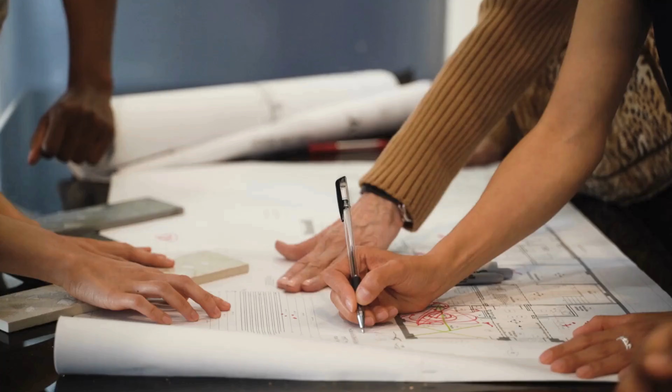The reason BIM exists is because construction is incredibly collaborative. Even a relatively small project might involve several different specialists, architects, engineers, contractors, suppliers, clients, and the list can go on. And all of them need different information. The problem is that they've often been working from different versions of it.

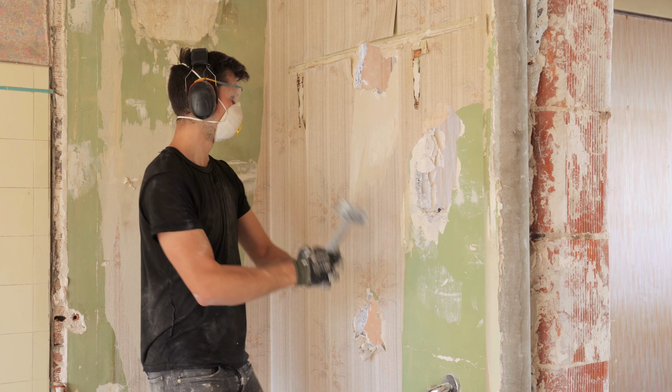One person has a spreadsheet, someone else has an updated version. One team is working from one set of drawings, whilst another team is working from something completely different. Someone might change the location of a door and update the layout drawings, but not the structural drawings. So now there's a hole for a door that's moved. This then leads to delays, rework, and extra costs. That's why BIM exists in construction.

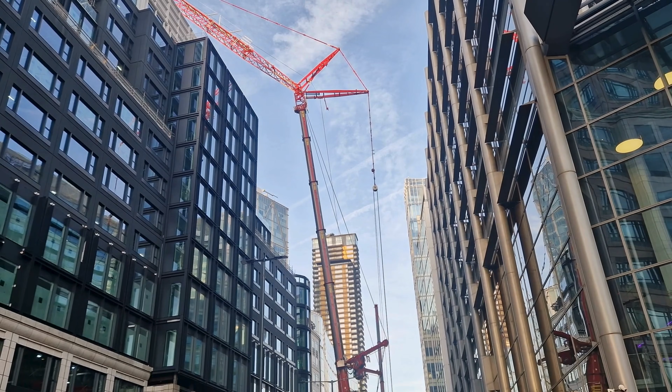At its core, BIM is really about managing information so that the right people have access to the right information at the right time. Now, in architecture, engineering, and construction, a single project will generate incredible amounts of data. Some of this data will be stored within a BIM environment, but there's still lots of information that lives outside of the model itself. And this is where the Common Data Environment, or CDE, comes in.

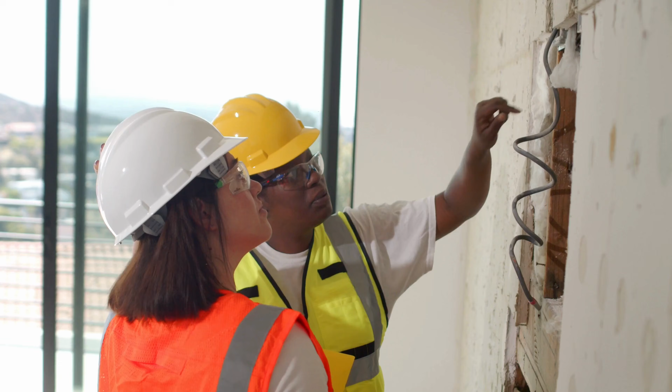The Common Data Environment aims to be the single source of truth. It's where project information is collected, managed, and shared. This includes not only the information you would get from a 3D model, such as what it looks like, the shape of things like walls and doors and where they're positioned in space, but also the descriptive information you need to support it. Things like fire ratings, manufacturer specifications, maintenance information, and commercial data such as costs.

But then what's the difference between BIM and the Common Data Environment? Well, BIM is the process or strategy for how we manage digital information, whilst the CDE is the platform where that information is stored. The CDE enables your BIM strategy.

Let's take a song as an example. BIM is the actual track. It's the music, lyrics, instrumentation, and audio files created by the musician. Whilst the CDE is something like Spotify, Apple Music, YouTube Music, or SoundCloud. It's the platform where the tracks are uploaded, stored, and organized into albums. This is how music gets updated and distributed so that all the fans are listening to the exact same version.

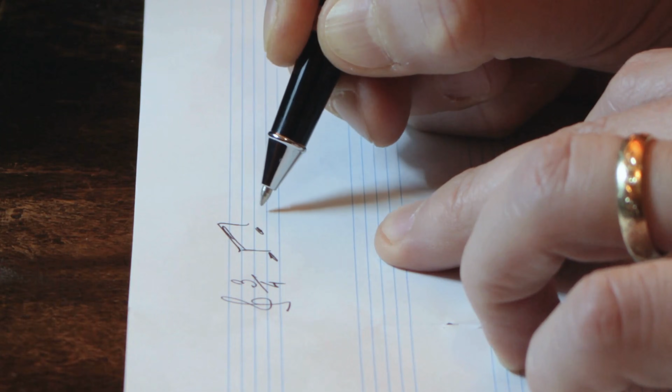And just like how a singer, a drummer, and a saxophonist all contribute different elements to a song, an architect, an engineer, and a contractor can all contribute different elements to a BIM model. And if an artist decides they want to change the chorus or a lyric, they can upload a new version that everyone can listen to straight away, as opposed to in the past where you'd be stuck with whatever CD or mixtape you happen to buy at that moment in time.

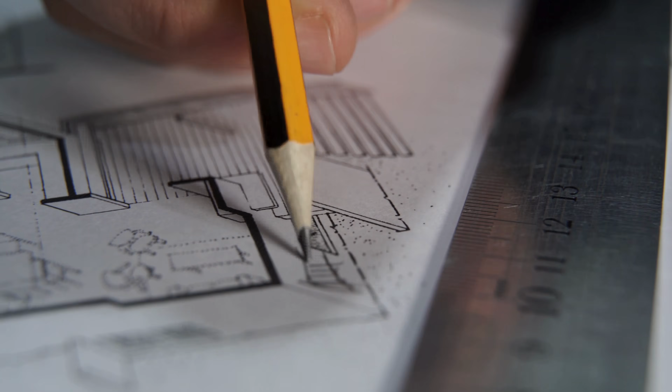And again, it's the same in construction. If an architect moves a door, updates the specification, or changes part of the design, everyone can access the latest information rather than working from an outdated file. But BIM isn't just about storing and sharing information, it can also connect different types of information together, and that's where the different dimensions of BIM come from.

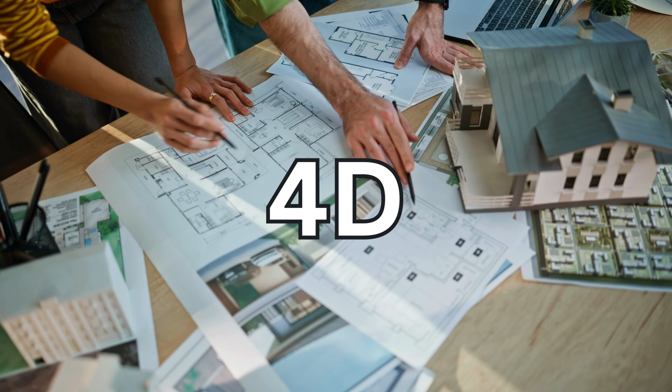Historically, we had 2D drawings, and then along came 3D. You take the X and Y of a traditional drawing and add the third dimension in space, allowing you to better visualize what you're building. After that comes 4D BIM, where you add the construction schedule. This includes the duration and timing of when things are getting done, and also includes the logistics, so what's getting done first, who's working where, and where on site are things getting delivered.

It's useful for identifying clashes not just in the design, but in how the project is actually going to be built. Then there's 5D BIM, where cost information is added. Now you can start linking the model to budgets, quantities, and project spend as work progresses.

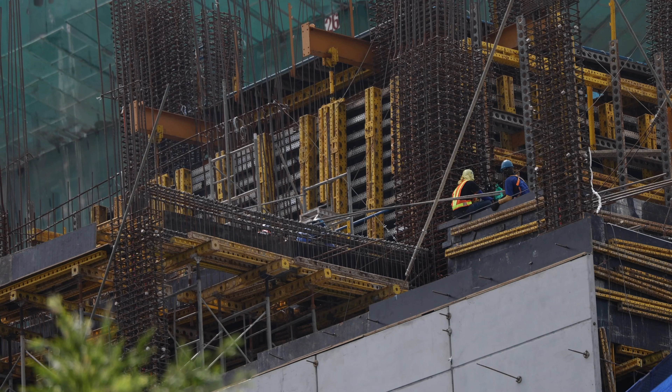Beyond 5D, you may hear people talking about 6D, 7D, or even 8D BIM. The exact definitions vary depending on who you ask, but they generally relate to things like sustainability, facilities management, and safety. The important thing isn't really the number, it's that BIM allows information to be connected together in ways that help people design, build, and operate assets more effectively.

And that's why BIM is the foundation of digital construction. Because at the end of the day, construction isn't just about concrete, steel, and machinery, it's also about information, and BIM is how the industry manages it. We've now covered what Contech is, why technology adoption is difficult, how construction actually works, and finally, the digital foundation that underpins it all. Next, we're going to start looking at the technologies themselves.